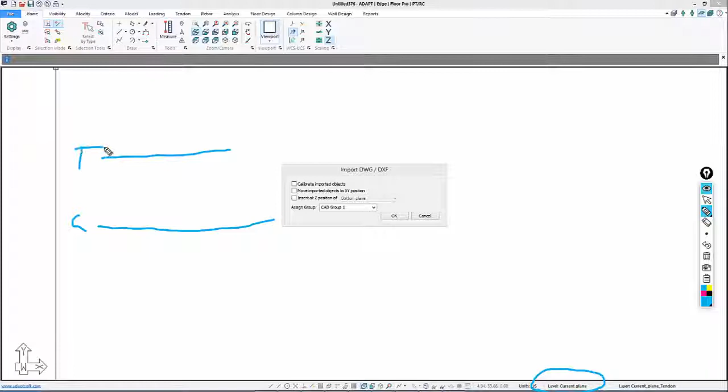Also, we're going to insert at the current active plane, and we'll use this tool to show that currently the active plane is called current plane. By default we have an elevated plane called current, top, and bottom. We're going to import this into current plane, based on this active setting. Currently that's the default setting.

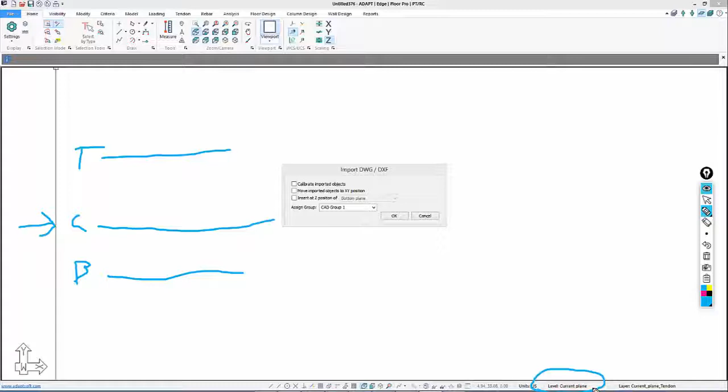Okay, we'll go ahead and do that. We'll name this CAD Group 1. I'll select OK. The CAD file will be imported, and these grids we're going to use to define a dimension.

So we'll go ahead. This is actually in metric. We're going to convert this to American units, and I'm going to select some of the snap tools which are located on this lower user bar. This is actually called the status bar.

And then at the far right we have story manager icons or tools, which are level assignment, active level up, active level down, single level, and multiple level mode. Some of those will be covered in additional tutorials that are in line with this or are in the same overall tutorial as this particular segment.

So let's go ahead and continue with the calibration. I'm going to turn on snap to intersection and this option, snap to vertices of components. And I'll go back—I think I had disabled the calibration. I'll just go here to the home menu under tools, and I can calibrate that again.

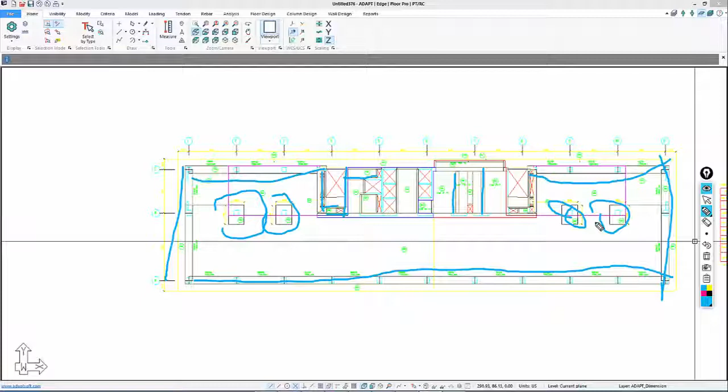So we're going to find a nice way to transform these without having to pick and select the control button while we do that, for different types of icons or different groups of icons. So the first thing we'll do is columns.

If I double click on this column, that will open the properties of the column. I'll go to properties, and you can see this says adapt columns lower modeling. So we want to isolate that layer.

I'll go to home—we're already on the home ribbon. Under display, I'm going to select layer settings. I'll turn all layers off, and I can use this to sort the different layer names alphabetically.

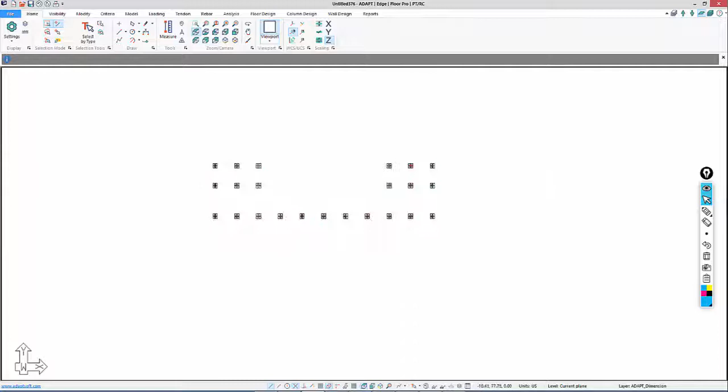This is called adapt columns lower modeling. I'll turn that layer on, and now we have our columns. I'm just going to window select the columns, and under the model ribbon, we'll use the transform panel to transform columns.

That transforms those components to columns. I'll go back to home, and under layer settings, turn all the layers on. So we have columns in place. Now I can easily select the drop panels, since there are only 4 of them. I'll go back to model and transform the drop caps and panels.

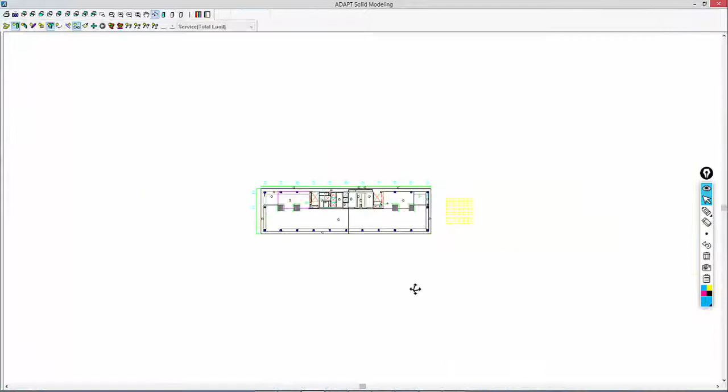If I want to see this thing growing in terms of the structural components, we can go to visibility under the render model tool, also located at the bottom on the status bar, and you can see components that have been created - the columns and the caps we just created. Those caps need to be properly sized in terms of their thickness. We'll go back and add a thickness to them in a moment.

Let's do the perimeter beams. We'll select the beams. I could select these by turning off all layers and isolating, but this is easy enough to select manually. We could window select, but you have to be careful not to select other components, so I'm clicking on these quite carefully. Within the core, I'm not going to transform those beams - just the main beams on the perimeter. We'll transform walls and openings in the core, and leave the slabs as solid, just to simplify that region.

So I have selected the beams. I'll go back to model, transform, and we'll transform beams. If I go to visibility, you can see I now have beams on the perimeter.

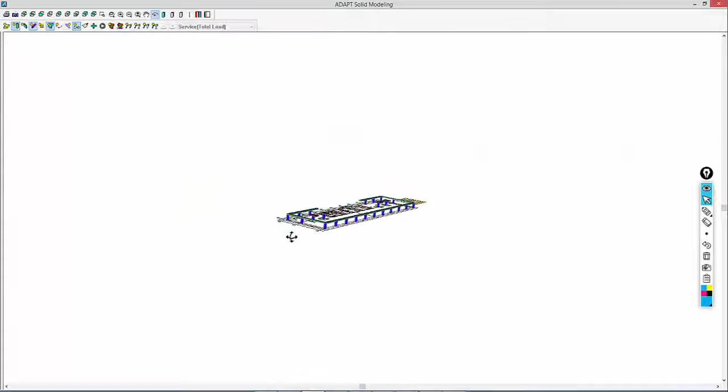Those will need a depth assigned. Right now the depth is based on the default, I believe it's 20 inches. If we double click on a beam, press tab, notice this red handle, this X - that indicates that's the structural component. I can then go to item properties or modify item properties, and this is actually 20 inches, so we'll change that to 24.

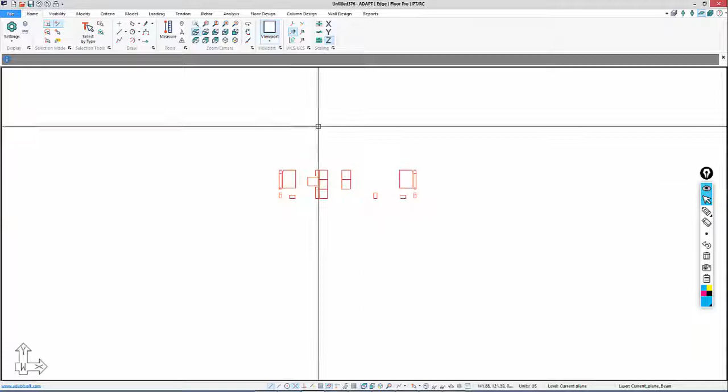We'll go ahead and isolate openings now. I'm going to determine which layer those are on. If I double click on an opening, adapt openings modeling is the layer. We'll go back to home, turn all layers off, and then find adapt openings. It's this one here, and these are the openings that we're going to transform.

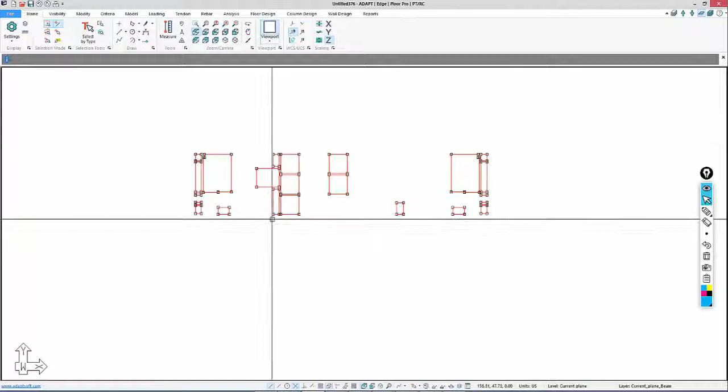You can see there's quite a few openings. There's a few regions here that we might want to make modifications to. For example, we have a tiny little edge here, and that could cause some densification in the meshing of the model, but we'll leave this as is for now. We'll select those, go back to model, and convert those to openings.

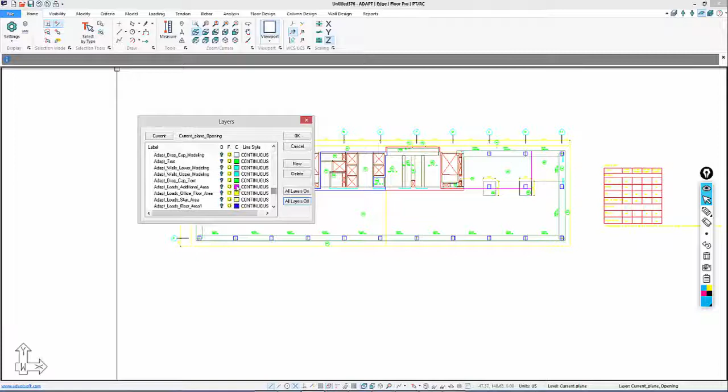Now I'll display everything again using Home, Layer Settings, turn all layers on, and we're going to isolate walls now. The walls layer should be Adapt Walls Lower Modeling. Okay, these are our walls, and we'll go back to Model.

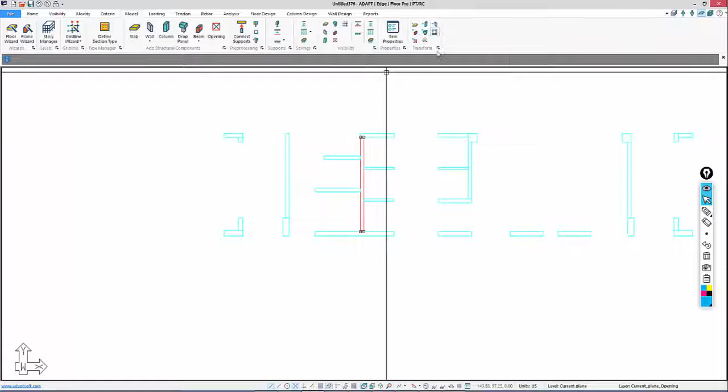I'm going to use Transform Linear Walls because some of these walls are all straight lines. If this was one compound polygon, we would use compound, but here we have walls that are linear. So there are walls that actually qualify as columns that we may not transform - like these. I'm going to select those individually, and even this one individually, and transform those to columns.

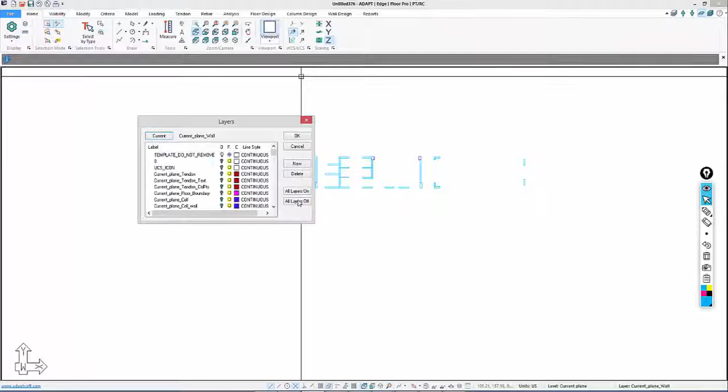Then I'll select the rest. Let me just do that - deselect this, deselect that, deselect that - and then we'll transform everything else to a wall. If we go back and reset this to all layers on, I'll go back to visibility, down here, this little teapot icon, and you can see we have our walls established here.

We do have a couple locations where we may actually choose to model these beams. Let's do that - this is a beam along this line, and then we have a beam here, there's a beam there, and this beam here. So we're going to ignore this stuff happening on the outside, and I'll just go to Model and transform those beams.

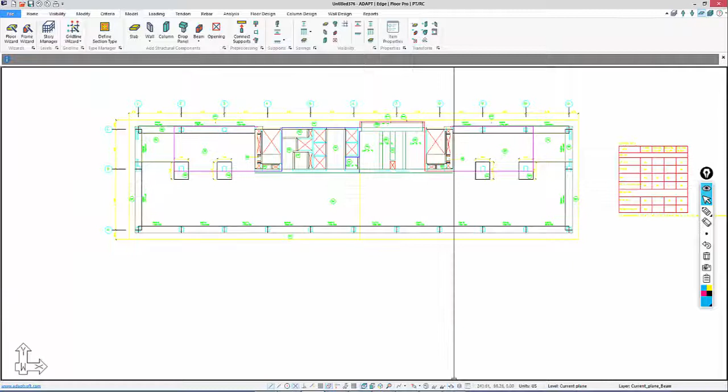Okay, the last thing we're going to do is transform the slab. Now the slab we're actually not going to transform, we're going to just model the slab using tracing. So we have a polygon here on the outside that we could transform. If I use this option to transform, you can see that actually adds a slab on the perimeter.

If we had additional slabs that might be thicker, for example in the core, we could overlay that inside, and we would have to trace. So instead of transform, I'm going to select the option to model or create a slab, and I'll use my snap tools at the bottom to make sure I'm snapping in the right location, snapping to the edge of the corner of that beam, and going out to this location.

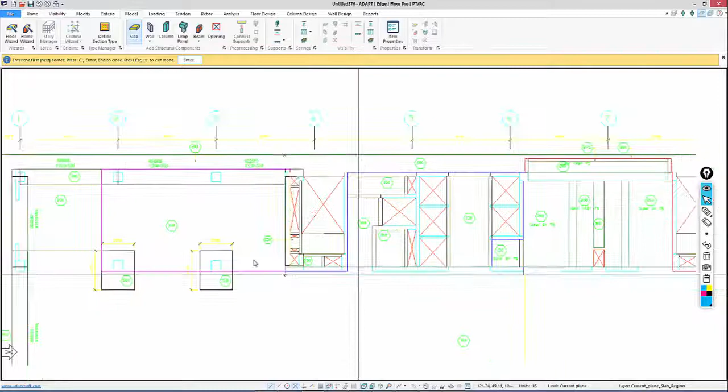Here I don't know exactly where this aligns, so I'll just snap here and go back and adjust that. Once I'm done placing the slab, I'll press Enter, or I'll press C to close it, and then we can exit out of the command.

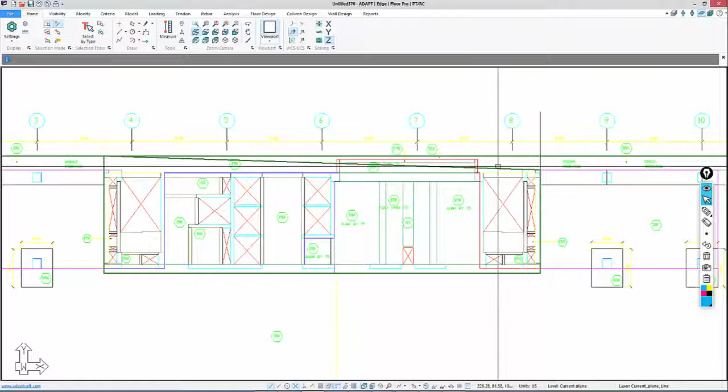I want to move this point up to this location, but I need a reference point there. So I'll go back to Home and use the option to create a line, from here up to the edge of that slab, using Snap Orthogonal to align it in the global Y direction. Then I can take this particular slab and move that point up to that location, something like that.

This will be a thicker slab region than everything else. We can overlap a slab without having the program double count the stiffness or double count the self-weight. Slabs nested on other slabs essentially control the geometry of the location where the slab is placed. So within this region, this slab geometry, even if there was an offset, would take precedence.

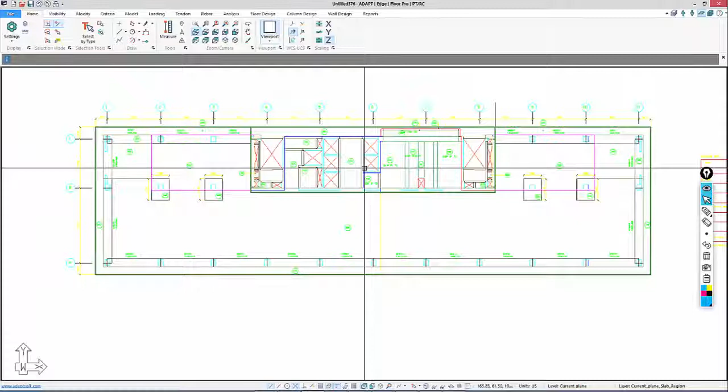We can always define an offset by pressing Tab here to select that slab, then going back to Modify Properties. This one is 8 inches. If I go to Location, I can create an offset vertically — positive is downward, negative is upward in terms of the input. So we'll make this slab 12 inches.

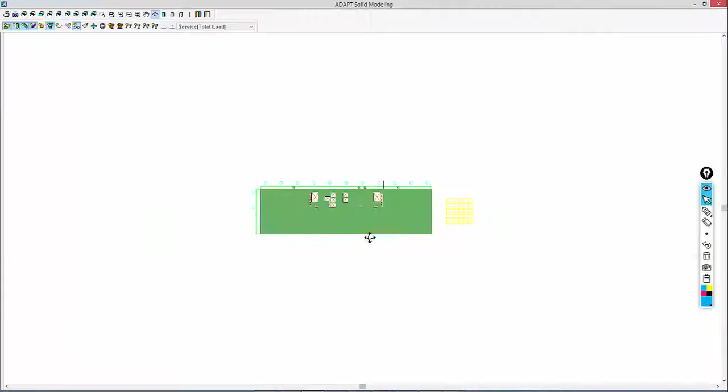And we've converted this now to a model. So if we go back and check our visibility using the teapot tool, this is the model we have: supports below, openings, beams, slabs, and drop panels.

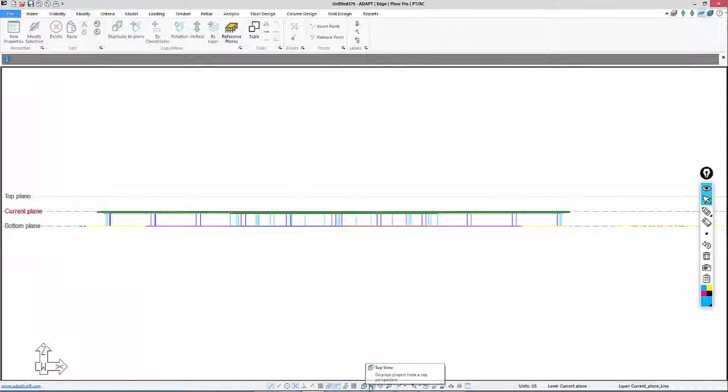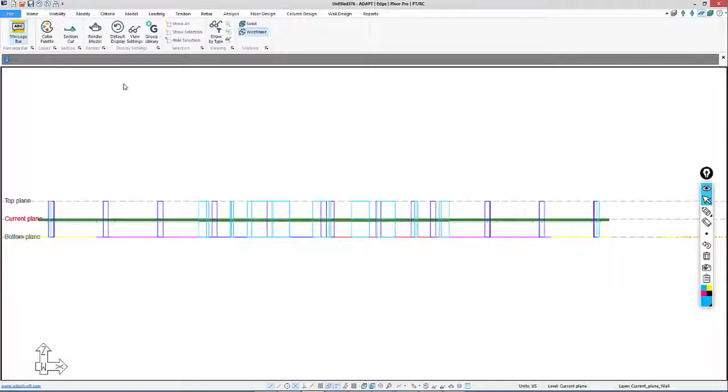If I select my columns and walls and want to copy those vertically, I can do that a couple of ways. I can change the view using one of these predefined viewing options — this, for example, is a front view. Then I can window select those components. To modify them by copying vertically, I go to Modify, under the Copy Move panel, select vertically, and copy these up one time. Okay, now we have something that looks like this.

So that's how we would transform a CAD file into a model, a single level model, in ADAPT. I'll go back to a plan view — go to Home and use this option for top view.

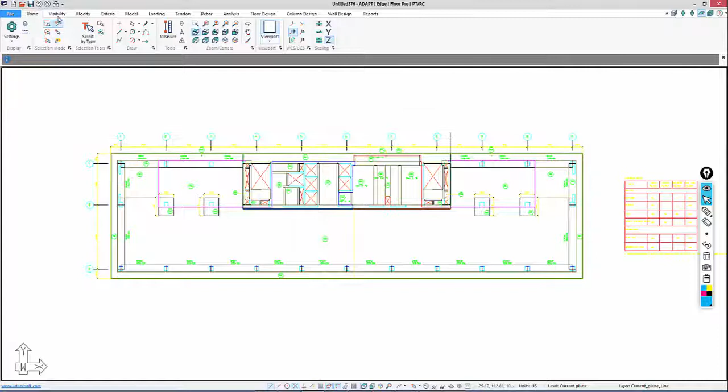Now I may want to turn the CAD file off. To do that, it's under the Visibility ribbon, under Group Library — the CAD file is stored as a group, and I can see this CAD import 1. I'll select it to be off, and now I'm left with only the actual structural model from the CAD representation.

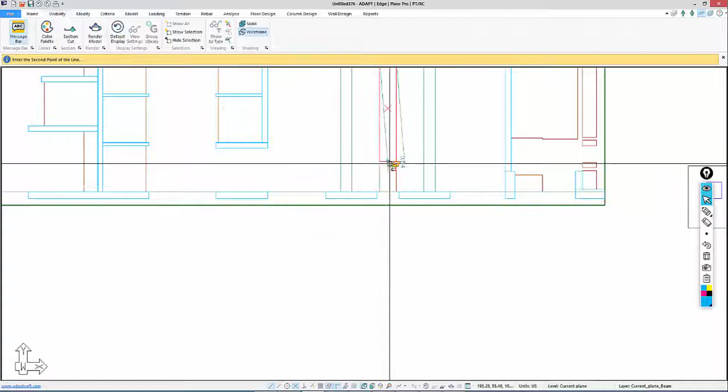There's a couple things here we may want to fix. I might want to move that beam to the location of this opening. This beam is actually unsupported, so we're going to get rid of that beam. We'll leave this beam and this beam in place.

Lastly, we're going to look at level assignment. If we go to Model, Story Manager, you can see we have 3 default level assignments: top plane, current, and bottom. Currently this is at the current plane. In later segments of this tutorial, we will discuss how to create additional levels once it comes to generating a multi-story model from this particular floor. Thank you.